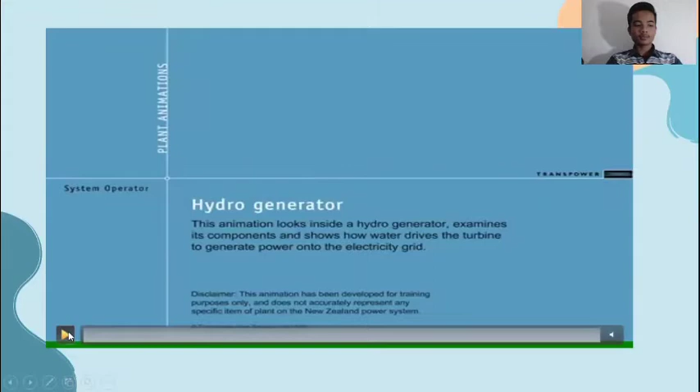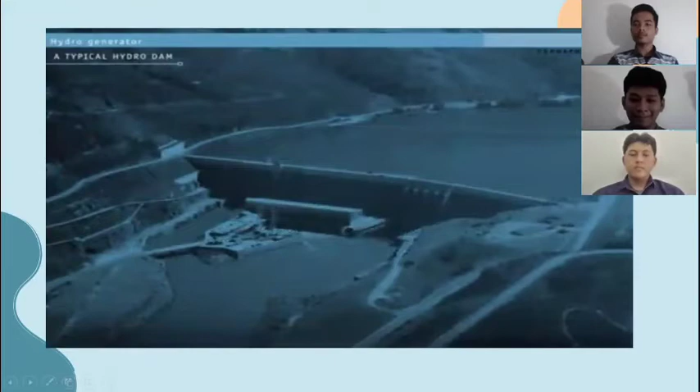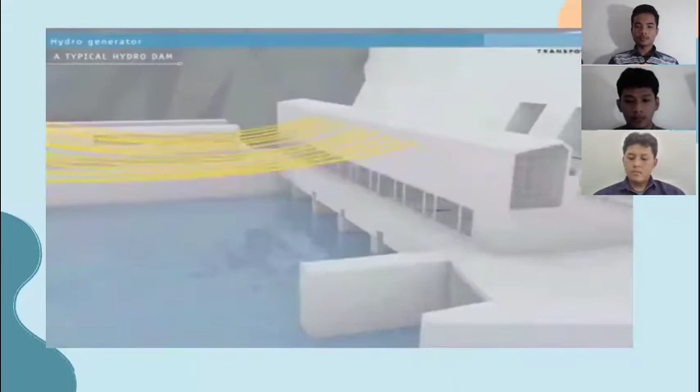In this animation, we'll look at how a hydro generator works. This is a typical New Zealand hydro station. You can see that the station has a dam, which creates a drop from one water level down to another. From outside the station, we can't see the generators. If we approach though, we can see the power lines or conductors that carry the electricity from the station to the national grid. Each power conductor connects to a turbine-powered generator inside the dam itself.

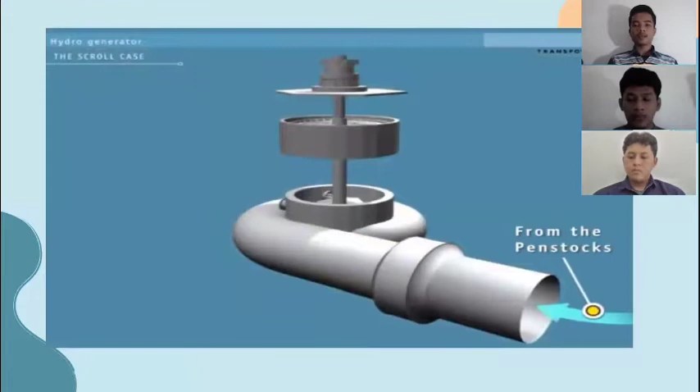Let's go inside the dam now and look at one hydro generator to see how the power is produced. The water from above the dam flows down through pipes called penstocks. Each penstock has its own head gate at the top to stop water flow for maintenance or during an emergency. At the end of the penstock is the scroll case.

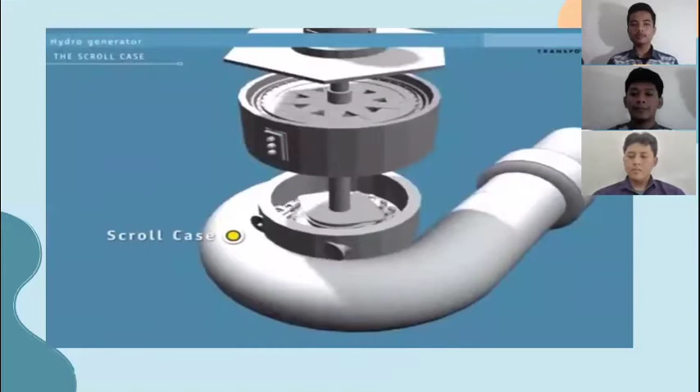This curls around the turbine like a snail shell. It's designed to create a consistent pressure of water entering the turbine from all sides.

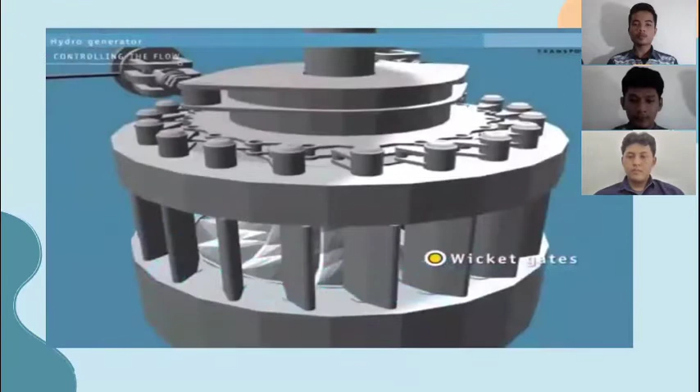Inside the scroll case is a set of vanes called the wicket gates. These control how water flows into the turbine. The wicket gates are controlled by an external governor system. This opens and closes them in response to conditions on the national grid. A high load on the system slows the turbine. The governor system reacts by opening the gates further to speed it back up. Conversely, it will narrow the wicket gates in response to low load on the system.

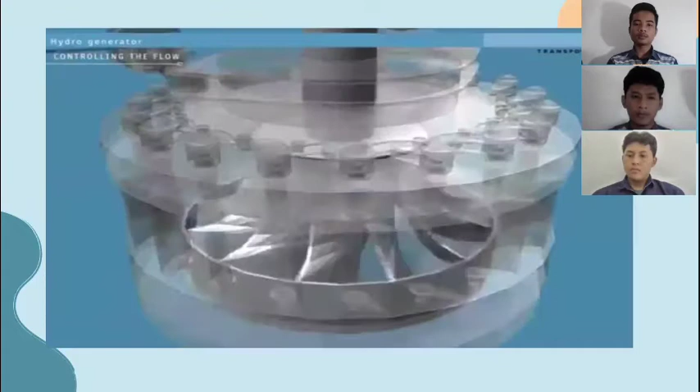Beyond the wicket gates, we can see the turbine blades. The blades are shaped to extract the most possible spin from the moving water. The turbine blades and the shaft connecting them to the generator are called the runner. We will expand this into its parts so we can see them clearly.

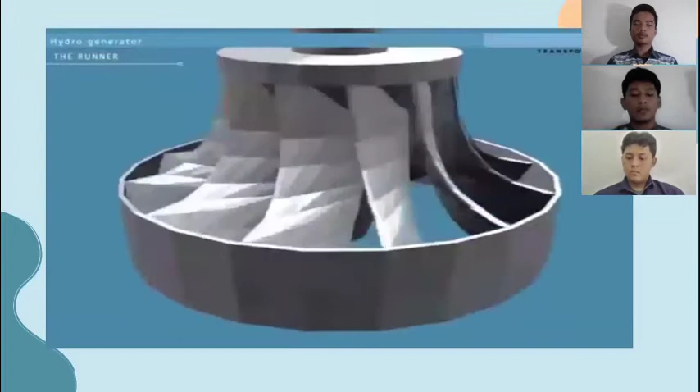At the top is the exciter, which gets a small DC power supply from a cable attached to an external controller called the automatic voltage regulator, or the AVR. Below the exciter is the generator. The inside is a rotor turned by the runner. The outside stationary part is the stator.

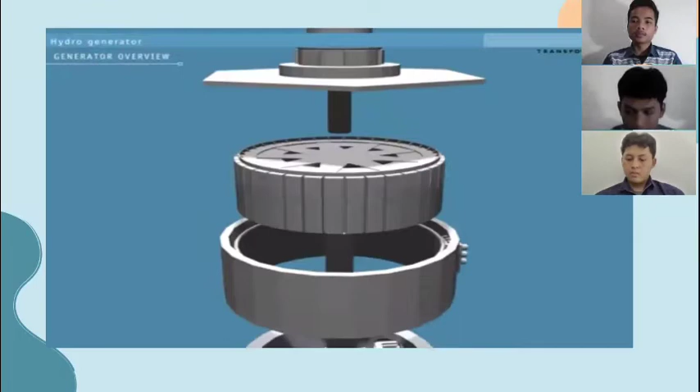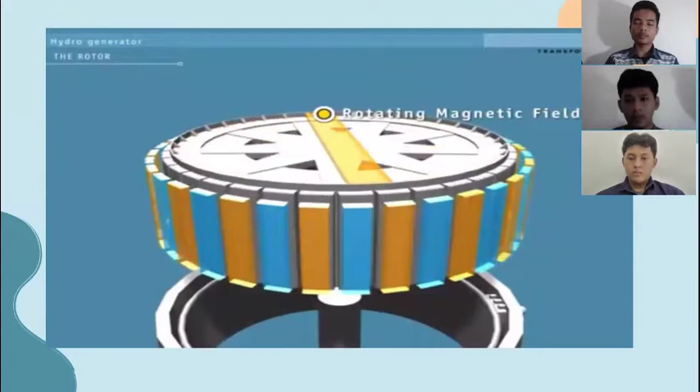This is made up of a set of 3 coils of copper wire called windings. On the rotor are a number of electromagnets powered by the DC current from the exciter. If these are switched off, the turbine will be able to spin without generating any electricity. The magnet's poles on the outside of the rotor create a separate rotating magnetic field for each magnet. The magnets are lined up so that adjacent poles always have opposite fields to each other, north-south, north-south.

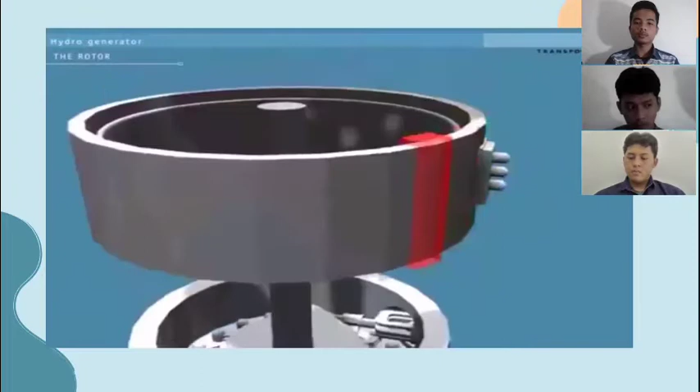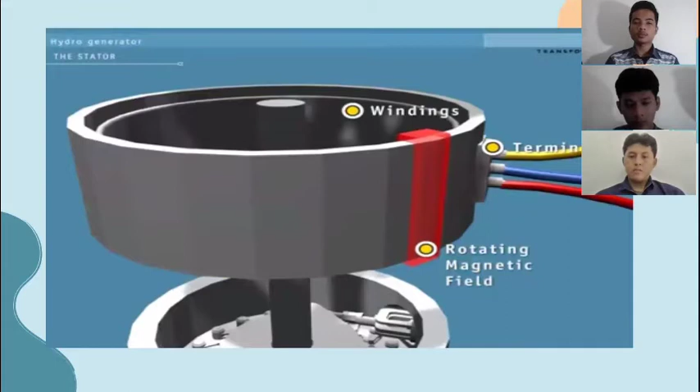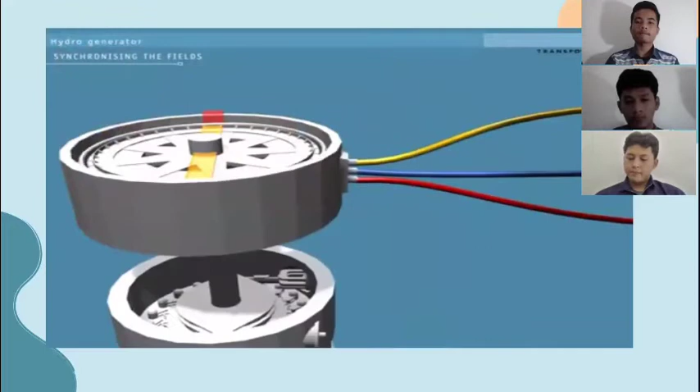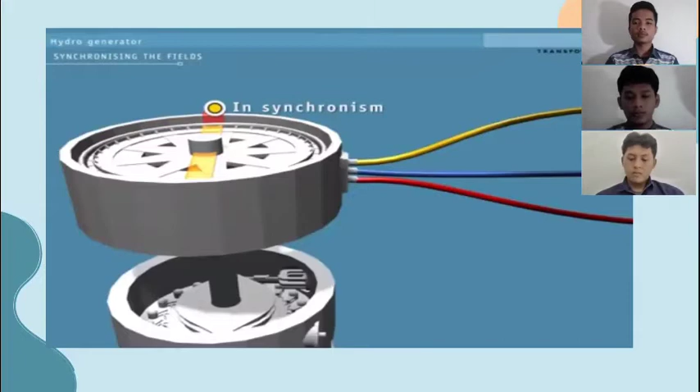System conditions can push the stator's magnetic fields out of sync with the rotor. The difference between the movement of the stator's magnetic field and the rotor's is the torque angle. The rotor has many electromagnets on it, producing a consistent flow of power.

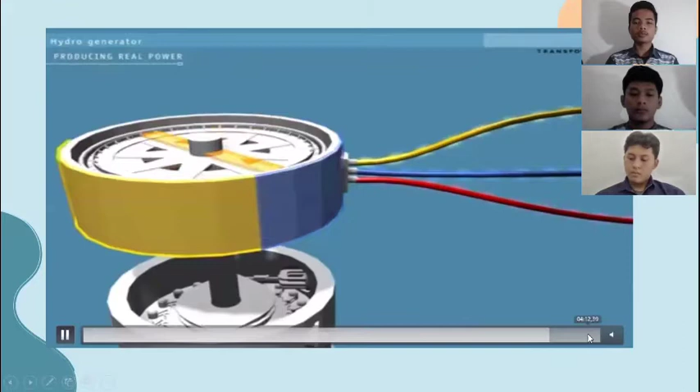The generator produces three-phase power by using different conductors to carry the power generated along different parts of the stator, as shown here. This creates a three-phase alternating current, which is represented by the sine wave.

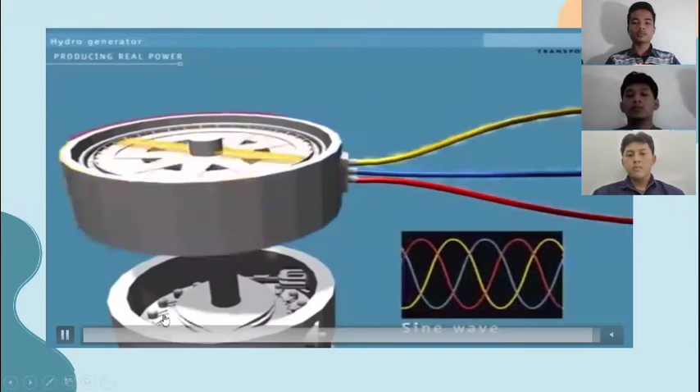In this animation, we will look at how a hydro generator works.

This is a typical New Zealand hydro station. You can see that the station has a dam, which creates a drop from one level down to the other. From outside the station, we cannot see the generator. If we approach, we can see the power lines or conductors that carry the electricity from the station to the national grid. Each power conductor connects to a turbine-powered generator inside the dam itself.

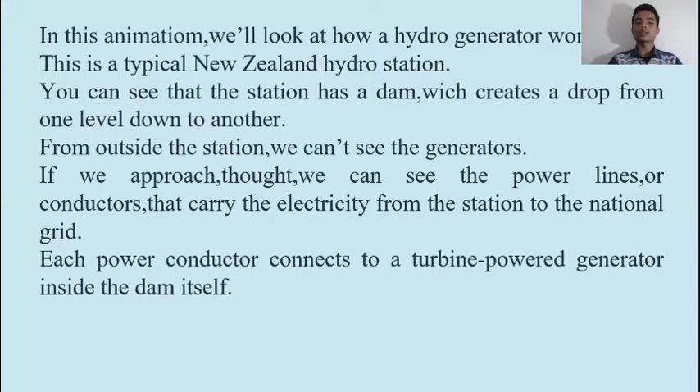Let's go inside the dam now and look at one hydro generator to see how power is produced. The water from above the dam flows down through pipes called penstocks. Each penstock has its own headgate at the top to stop water flow for maintenance or during an emergency.

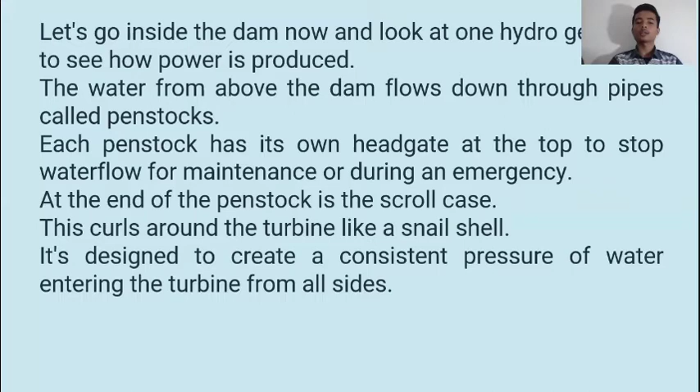At the end of the penstock is the scroll case. This curls around the turbine like a snail shell. It's designed to create a consistent pressure of water entering the turbine from all sides.

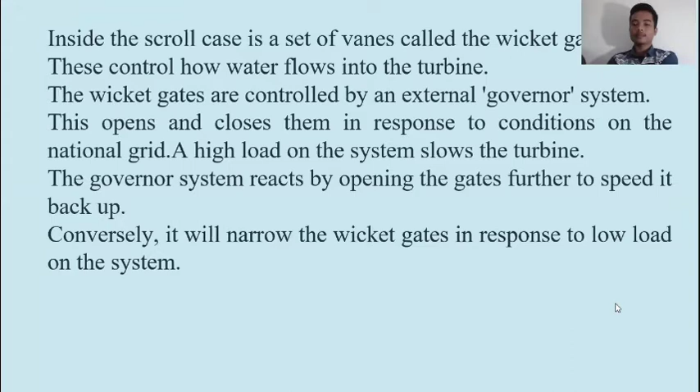Inside the scroll case is a set of vanes called the wicket gates. These control how water flows into the turbine. The wicket gates are controlled by an external governor system, which opens and closes them in response to conditions on the national grid.

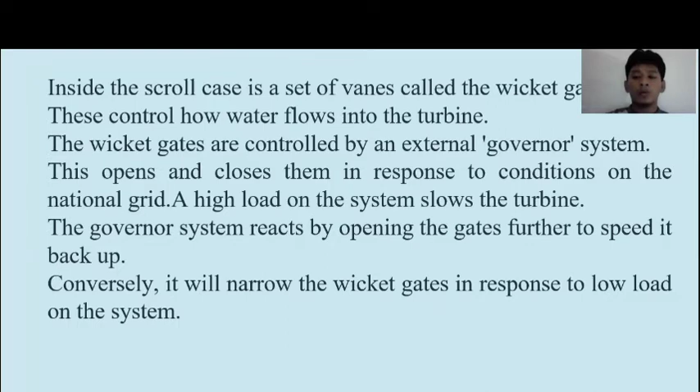A high load on the system slows the turbine. The governor system reacts by opening the gates further to speed it back up. Conversely, it will narrow the wicket gates in response to low load on the system.

Beyond the wicket gates, we can see the turbine blades. The blades are shaped to extract the most possible spin from the moving water. The turbine blades and the shaft connecting them to the generator are called the runner. We will expand this into its parts so we can see them clearly.

At the top is the exciter, which gets a small DC power supply from a cable attached to an external controller called the automatic voltage regulator, or AVR. Below the exciter is the generator.

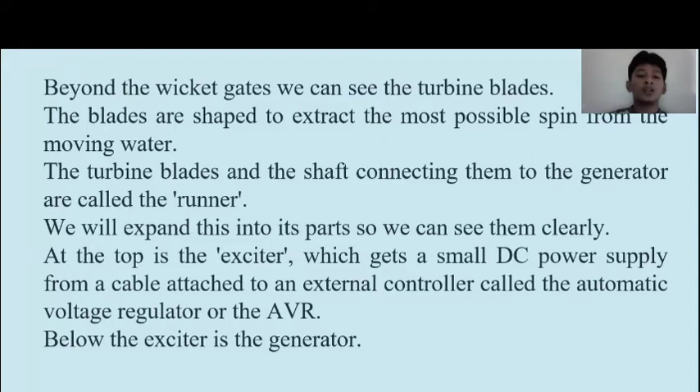Inside is a rotor, turned by the runner. The outside stationary part is the stator. This is made up of a set of three coils of copper wire, called windings. On the rotor are a number of electromagnets powered by DC current from the exciter.

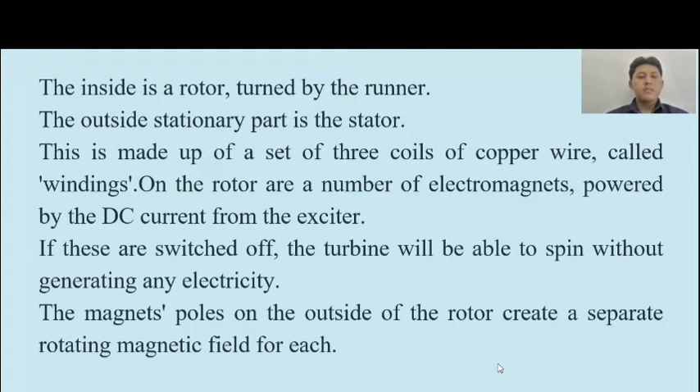The magnets are lined up so that adjacent poles always have opposite fields to each other: north, south, north, south. As the rotor spins within the stator, each pole's magnetic field acts on the stator windings. Each time a pole makes one full revolution, one pulse of AC power is generated in the winding.

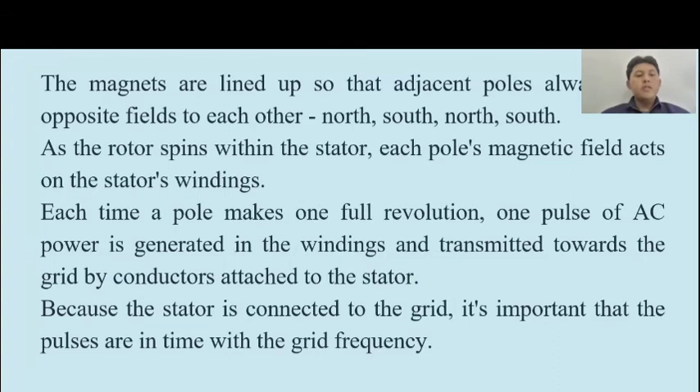This power is transmitted towards the grid by conductors attached to the stator. Because the stator is connected to the grid, it is important that the pulses are in time with the grid frequency. When the pulses are in time with the grid frequency, we say that the generator is synchronized.

The rotor has many electromagnets on it, producing a consistent flow of power. The generator produces three-phase power by using different conductors to carry the power generated along different parts of the stator, as shown here. This creates a three-phase alternating current, which is represented by the sine wave.

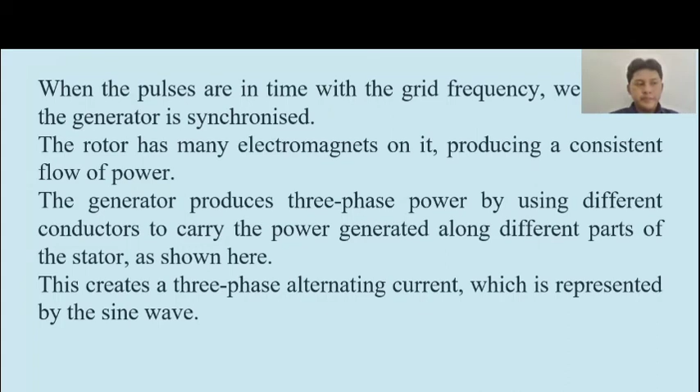In conclusion: the rotor has many electromagnets on it, producing a consistent flow of power. The generator produces three-phase power by using different conductors to carry the power generated along different parts of the stator, as shown here. This creates a three-phase alternating current, represented by the sine wave.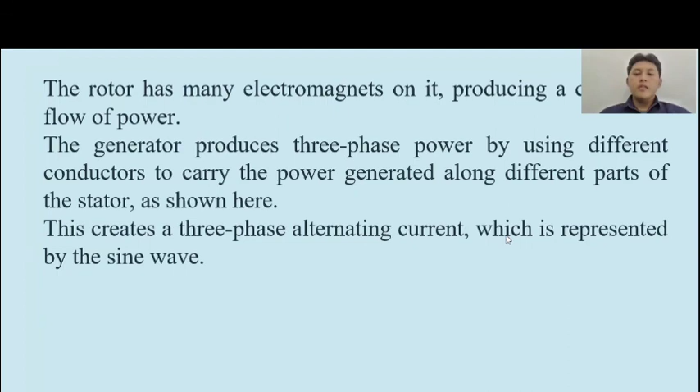In conclusion, the turbine functions to convert potential energy into mechanical energy. The force of falling water drives the propeller, causing the turbine to rotate. Water turbines are much like windmills: instead of wind pushing the propellers to rotate, water turns the turbines. This turbine's rotation is then connected to the generator.